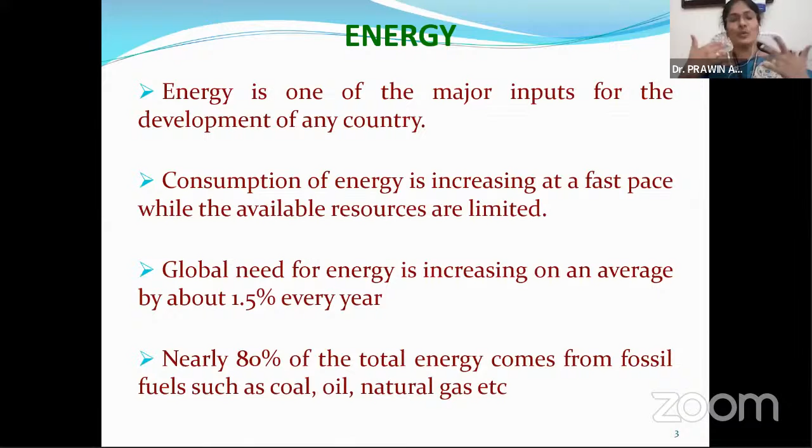We can't still keep on telling that energy is not there, energy is not there. Instead of putting our hands on someone else, we just turn it back to us: what we can do to increase this production of electricity.

Now, what is the actual drawback of fossil fuels? This coal, we have used for more than 100 years, and it is high time that we have to think of some other resources. Oil reservoirs are estimated to be just for 42 years, I guess. Gas reservoirs are estimated for 60 years. Now, this much is the lifespan for each and every fossil fuel.

Now, after that, even if you want to dig it and take coal, take oil and take gas, where from will it give? It has a limit, right? So we have to move into the next one.

And of course, because of this coal, oil, and gases, if you keep on using it, it will lead to lots of pollution, and of course it will lead to greenhouse effects. So it is our prime duty to concentrate on a different renewable energy resource in a way to conserve energy as much as possible.

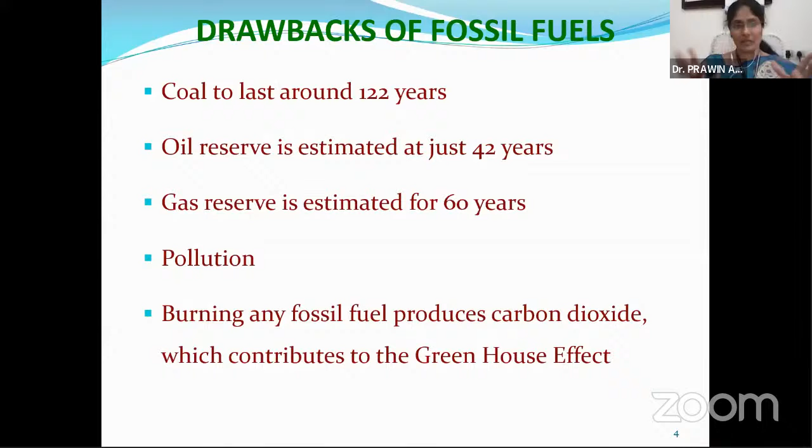Being said the drawbacks of the fossil fuels, I would like to highlight the advantages of renewable energy. Of course, there will be no pollution, no harmful effect, no waste products are given, and it reduces the cost of operation also. And it is inexhaustible, that could be got any time. It will not exhaust, unlike coal, gas, and oil which are limited for a certain period of time.

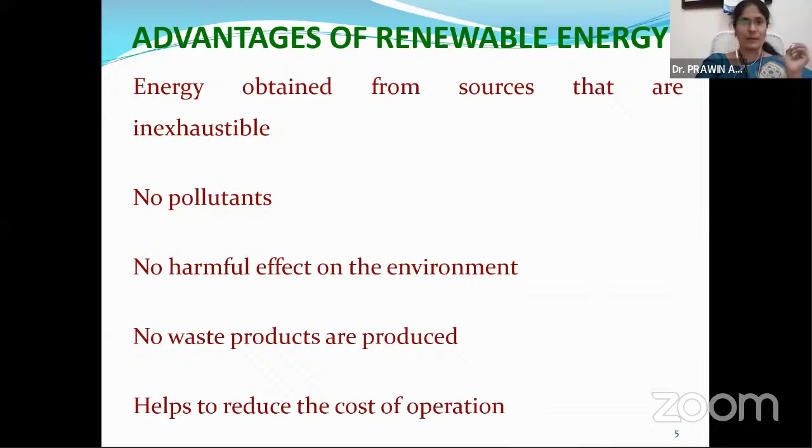But in my presentation I would be highlighting hydropower, because as you heard in my introduction, I have been involved in few government projects. I personally felt that rather than talking about solar, wind, or whatever it is, I would like to highlight hydro projects which I have worked on, and how energy could be conserved by using these resources.

Before that, I would like to give you certain energy demands in our country. If you see the graph, in the year 2040, the increase is a 333% increase of energy demand required for our country.

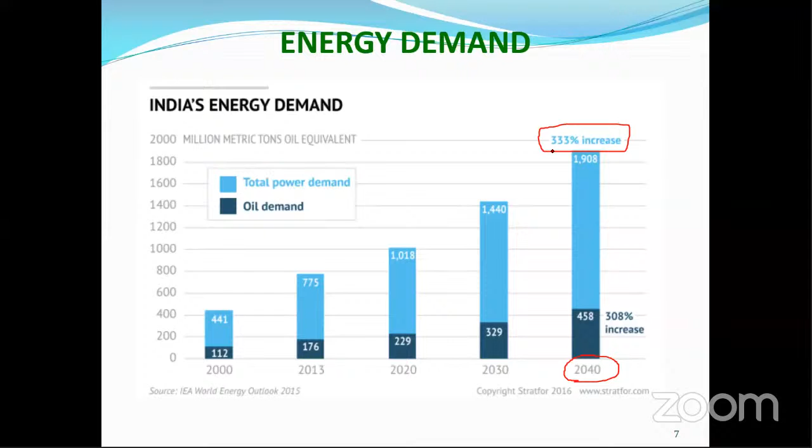So the power capacity, we have added a lot in India by wind, solar, and a few other small renewable resources. I've just taken the statistics for the year 2018. For 2018, coal was only 25%, wind was 12%, solar was 50%, but renewable energy utility was 74%. So we were able to have an additional power capacity higher because of this renewable energy.

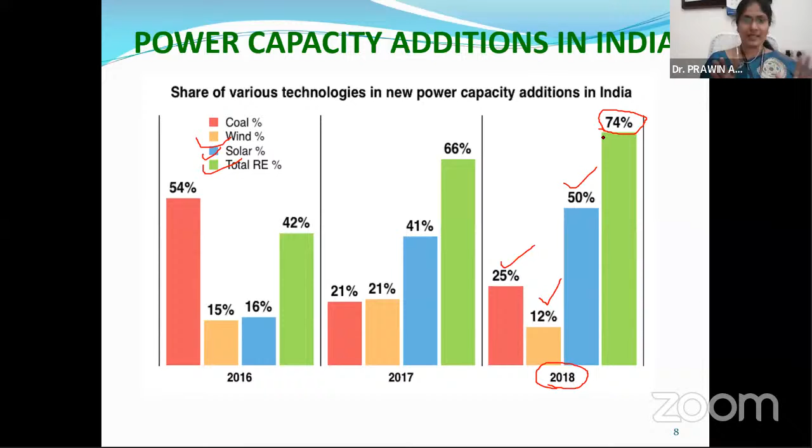All these things are not told by me, I have just drawn the graph, but these are all statistics. You can Google, you can see Wikipedia, and all these things I have just projected in a slide for you to get an idea. So none of the data given here is exaggerated, it is all exactly as per the statistics of Indian government data.

Now, being said about the advantages and disadvantages, we want maximum customer satisfaction. And how to achieve it? How to conserve this energy? I'm talking about energy being required, but how to conserve it, ma'am?

If that is the question rolling in your mind, and few of you might have a doubt, like, we want power for all, the country should be self-sustained with energy resources, we should not go and ask someone else for energy. So we wanted energy for all. If that is the question, here comes the answer: eyeing on the silver lining of certain points, how to achieve it could be through generation capacity, improving the generation capacity, improving the power quality, metering methods, deregulations, distributed generation, automation, so many aspects are there.

As an electrical engineer, I am putting it forward to you. But our point of discussion today is on energy conservation, one of the major factors which could be taken up by any layman in the country to see that everyone is happy with maximum power.

So energy conservation is the major parameter. We have so many electrical parameters as listed down in my slide, but energy conservation is really important to make India economically strong.

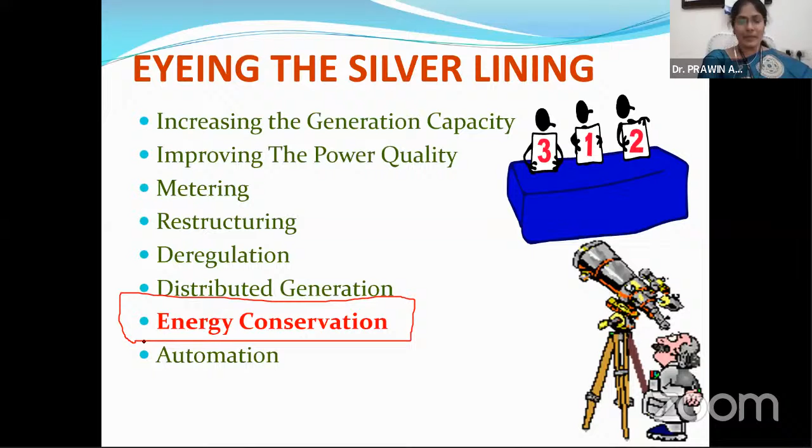Okay, so now I have told you certain requirements of why energy is required, and I've given you a few highlights about renewable energy. All these things you might already know, right?

Okay, now I'll give you certain statistics of history: what are all the accidents that happened before, not only the accidents, but what are all the issues faced and how we are going to rectify it. I just took this analysis when I had to prepare these slides for the presentation. I was really doing a very long survey to find out what are all the hazards taken up and how I'm going to give a solution for all these things.

Way back in the 1930s, we normally say—can anyone say what is the frequency level of our electricity supply?

Ma'am, are students given the provision to unmute their microphones? Yes, ma'am, they can unmute and answer.

Okay, so anyone, if you know, you could answer. If you don't know, also no issues, not to be bothered about it, because whatever I'm going to ask has something to show in the presentation I'm presenting, that is the reason I'm asking you. I know you're all first years, but you're all smart enough because you have studied your physics in your 11th, 12th, and 10th boards, and that is how you are into a very good institution now, so you're strong in your basics. Now, what is the supply which is there? What are the two different types of supply?

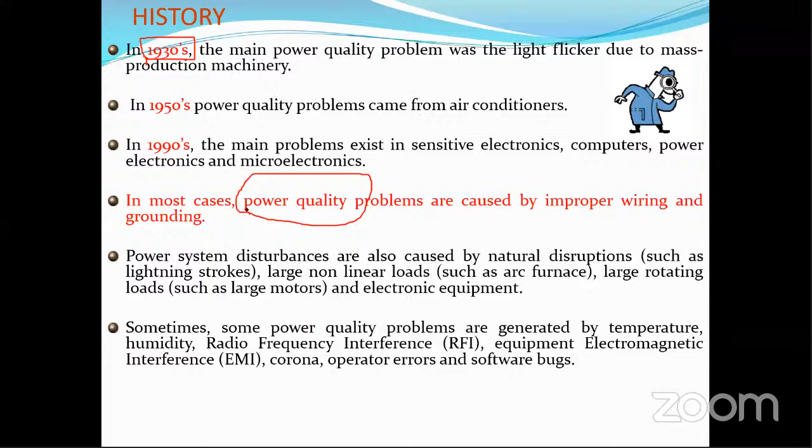asks you, please respond to them. Next time onwards, if anyone asks you why is it that you're not able to connect, the frequency level is entirely different, and that is the reason when you get a mobile phone from US or UK, you can't directly plug into it, because our frequency level is only 50 hertz, but their frequency level is higher at 60 hertz, and they don't have power failures at all. Very rare power failures are there, but I have found out a few statistics wherein they also had power failures, which I'll show in my slides now.

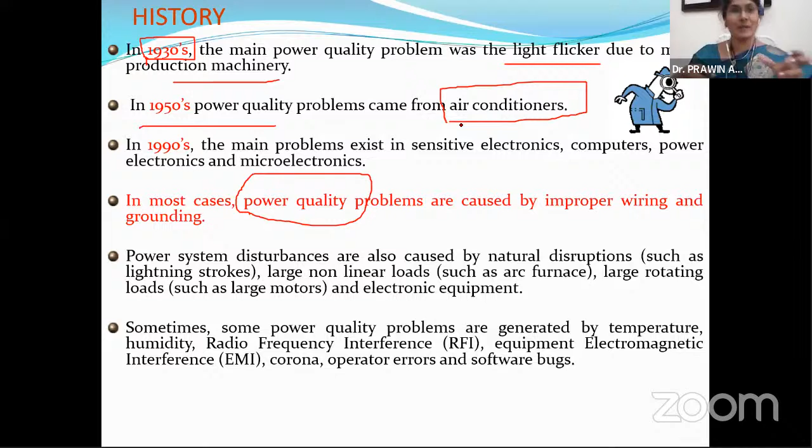Now coming back here, in 1930 there was a main problem of light flickering due to mass production in machineries. In 1950, there was a problem because of the air conditioner. Air conditioner is a heavy energy consumption device. Okay, I'm coming into energy one by one. In the 1990s, the main problem was because of using electronic gadgets, computers, microelectronics, and so on.

In December 1996, I think December 3rd or so, in Scotland, the power supply was interrupted for 3 to 6 days. Normally we say only in India power supply issues happen. No, India is taking care of us so well that we should be proud to be citizens of India. With this much population, we are running a conservation scheme, and the government has put up different conservation schemes, and that is the reason you and I are seated here on an online mode with no interruption in power supply.

So it is not that we are not doing anything, we are celebrating this day actually. When do you celebrate your birthday? For which you are happy. So we are happy today that India is moving forward on energy, and that is why we are celebrating today as Energy Conservation Day.

Now, the data and statistics which I'm putting down here is not to put down any other country or anything like that. I'm just trying to project to you that India is doing energy conservation, which could be improved by citizens of India like you and me in the future. That's what I'm trying to project to you.

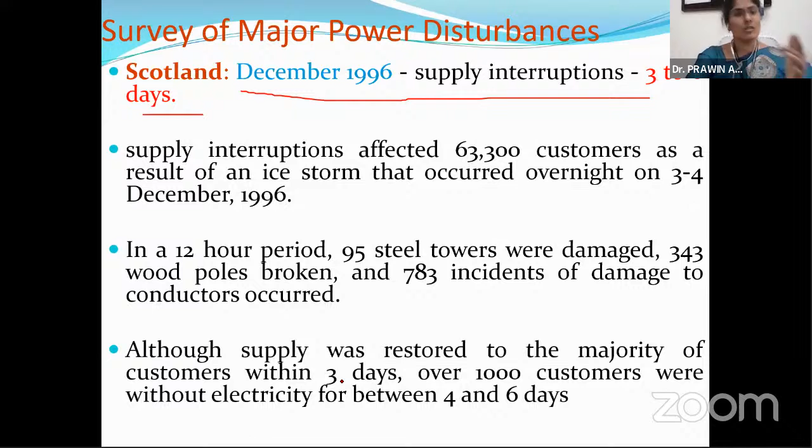Coming back to this, so when I was just browsing and seeing if there were any issues in December, since we are in the December month, there was in Scotland, December 1996, an interruption for 3 to 6 days. More than 60,000 customers were affected because of this, and lots of steel towers were damaged because there was no power supply. Lots of incidents took place there.

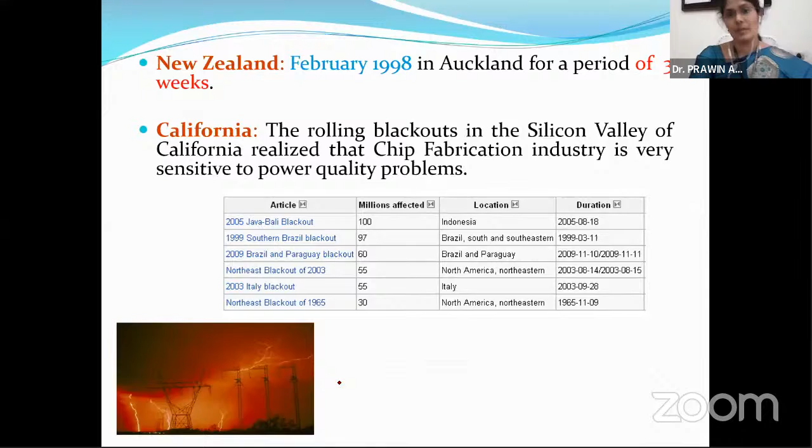Even in New Zealand, in February 1998 in Auckland, for a period of 3 weeks they had power failure. And in California, the blackouts in the Silicon Valley made them realize that the chip fabrication industry is very sensitive to power quality problems. And one was in Canada in August 2003, at the height of ice storms, more than 3 million customers were without power for 4 long days, sustained by severe winds greater than approximately 20 kilometers per hour. This caused lots of issues in Canada in 2003.

There is a small diagram, a picture that I've taken from Google to show you. So that is about country statistics.

Coming to our country: on January 2nd, 2010, the northern region, that is Himachal Pradesh, Jammu Kashmir, Chandigarh, all experienced a very bad interruption on the night of 2nd January. It was because of dense fog mixed with pollution, which was the reason that failed the strength of the insulators and increased the conductivity along the surface of the insulators, causing flashovers, and because of that, tripping occurred.

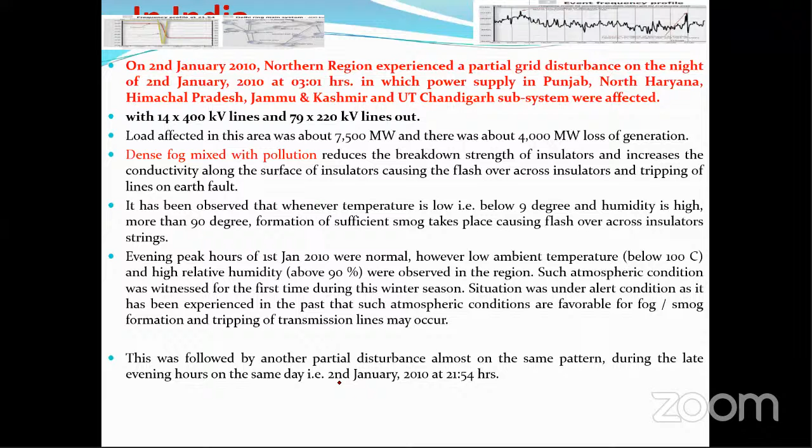All these things are a little bit electrical, but I just wanted to tell you why that happened. Now, dense fog mixed with pollution was the reason behind the issue that took place in Himachal Pradesh in India. We can't analyze what happened outside the country, so let's analyze what happened inside the country. This pollution is because of whom? That is a big question mark.

I'm not going to give you an answer. Can we reduce this? That is conservation of energy. You can't, because you can't directly take energy and put it in a different box and hide it. No, you can't do that. But you can do better conservation of energy by giving your inputs to such sort of issues that have taken place.

Coming back to this issue, it has been observed that whenever temperature is low, that is below 9 degrees and more than 90 degrees, some sort of smog, that is fog, takes place, which causes flashover. This is an analysis that they have done. This evening peak, the evening peak hours of 1st January 2010, were very normal. But however, because of this ambient temperature, observed in that region, such atmospheric condition was witnessed for the first time during that winter season. This was the reason which led to fog and smog, and it tripped the transmission line very badly. This was the reason behind it.

So now I've just given you a history of what happened in California, what happened in Himachal Pradesh, and all these things. But there is a difference between saving power, that is saving a lamp, saving 1 ampere, and lowering the power bill. This is a big question that has to be interrogated and thought about.

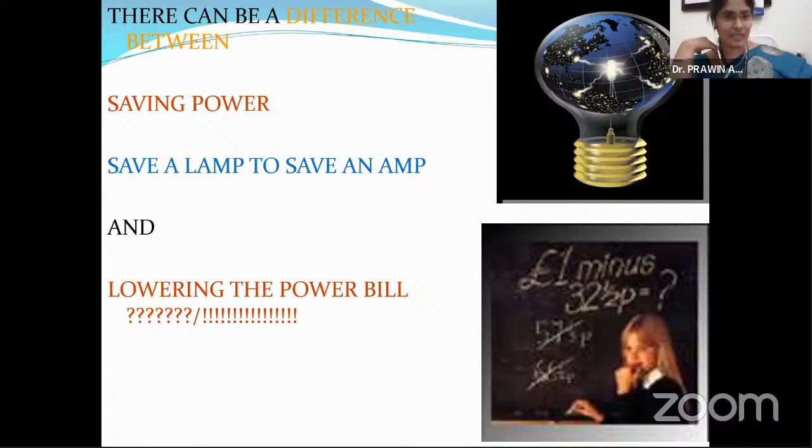Now, since we are talking about energy, as I showed in my previous slides, there are lots of energies. I would like to touch upon hydro energy, because this is my work which I have worked on. So rather than giving other details, I find convenient, and my data would be really apt if I talk about hydropower. Okay, any questions, students, until then?

Now, what is hydropower? Hydropower is actually a proven renewable energy resource, and it requires relatively high initial investment, which I accept, but has the advantages of very low operating cost and long lifespan.

Now, the government has given a lot of subsidies even for solar plants. We can generate solar power and even give it to the grid. They even give us a subsidy. But the reason why we are not taking up these renewable resources is the initial investment is very high.

But with renewable energy, the initial investment would be high, but in course of time, the economical advantage would be really surprising. People who don't know about these things, a layman can talk, but those who are in the field, you and me, are educated. We know what energy is, we know what renewable resources are now, as of now. In course of time, you will be studying more about it. So by the time you finish your third year, when you finish your degree, you should be able to give something to the society in terms of your projects at least.

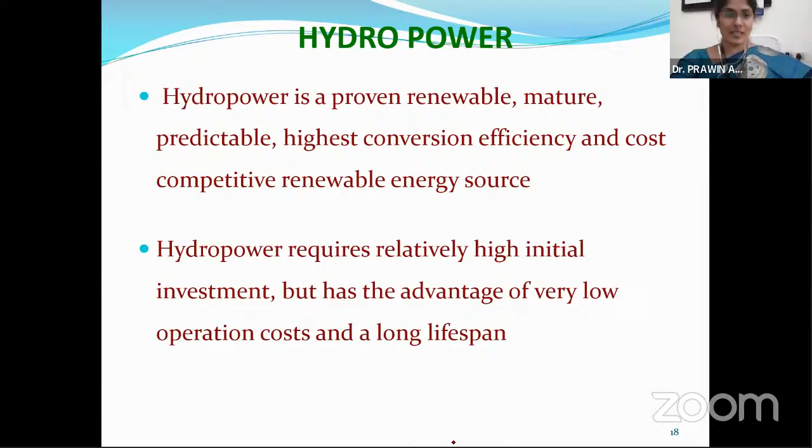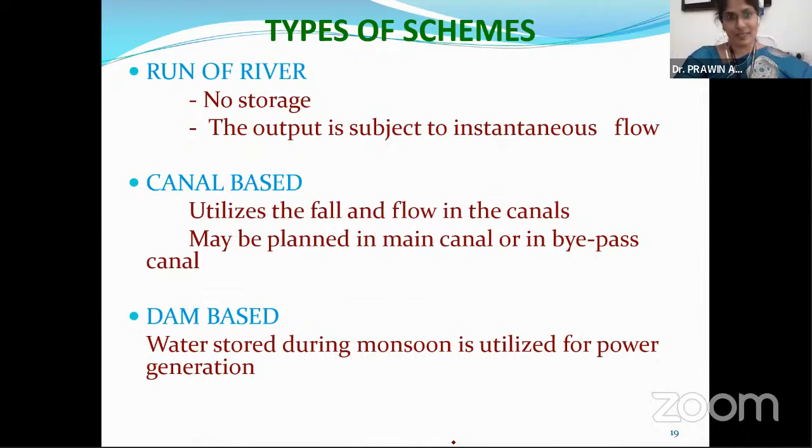Coming back to our presentation on hydro. Hydro projects, basically, we have different types of schemes. When you go for an outing with your parents or for any tour, you would have witnessed all these things: a run-of-river, canal-based, dam-based scheme.

What is a run-of-river? At my place, and you also would have, behind your home if any stream is going. Even in Karunya, we have a stream, a very big stream. Karunya is situated in the Western Ghats near Siruvani. I don't know how many of you know, we have lots of streams. When we step outside the window and go and see, we see the waterfalls from the mountains, a natural stream. There the waterfalls come.

We are not going to stagnate any water. We will put a turbine, which is a powerhouse there with a forebay and tail race. You can generate electricity. The water will be coming, rotating, generating electricity, and it will be going outside.

Even the place where I'm seated now is the Triple E Department of Karunya University. We have a solar panel onto the rooftop, we have a windmill onto the rooftop. All these things are energizing our laptops, our computers, our fan and light in this room. So what I'm trying to say is it is a runoff scheme. Here in this hydro project also, it is a runoff scheme. Okay, so you're not going to stagnate anything.

You can see a run-of-river scheme wherein the river is flowing this way. We are just taking up that water, generating electricity, and again it goes back. This is a photograph I took from a site. You can see water coming from different streams, and all this water falls into the powerhouse. Electricity is generated, and again it goes back. We are not stagnating any water.

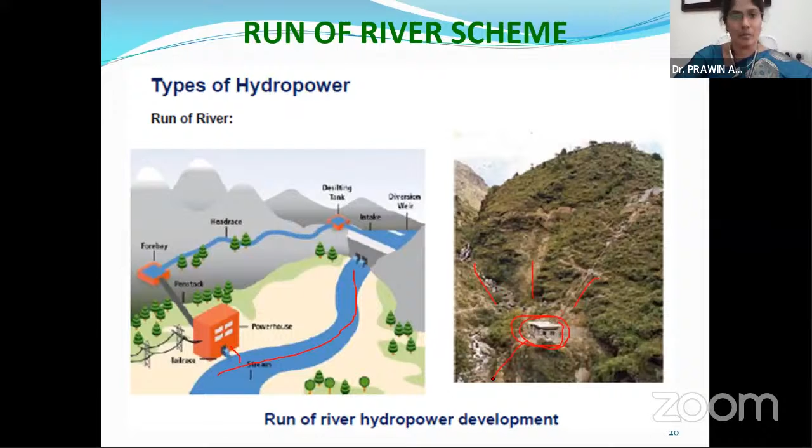That is one scheme, canal-based scheme. The water, which should actually run in this direction, we just take a spillway and divert it onto a canal, wherein we have a powerhouse, and electricity is generated. Quite simple, right?

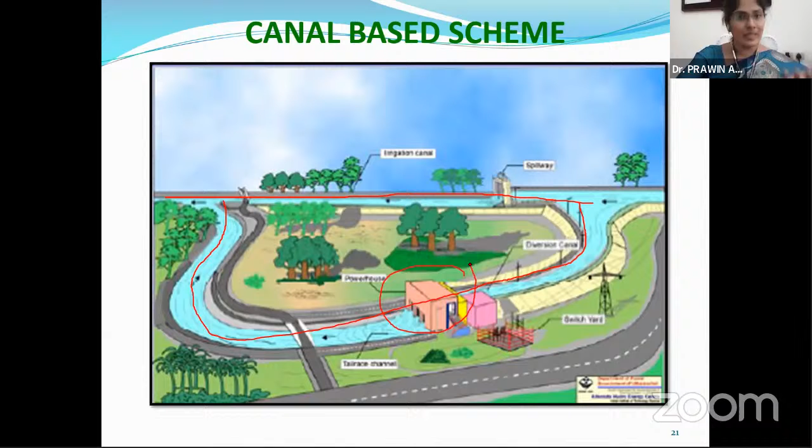This is canal based. We also have dam based. I think all of you know what a dam is. A dam is on the head, the pressure which has fallen down. Now the water falls at a very big height, from 90 to 100 meters head. When the water is falling at very high pressure, this pressure is converted into energy.

Being said this, I'll give you an example. Long back in the newspapers, I read about a college student in Bombay or Pune. It was a 20 floor apartment in Bombay and Pune. They reside in apartments, right? So in that 20 floor apartment, they do rainwater harvesting.

So that rainwater is collected from the terrace, and directly it comes and falls to the ground where a turbine is placed. This turbine, the water comes and falls down from a big distance, 90 meters, 100 meters, or 200 meters. Just assume a 25 floor apartment, the water comes at high speed, touches the turbine, electricity is generated, and that student was able to electrify his wing, whatever floor he is living on in that apartment.

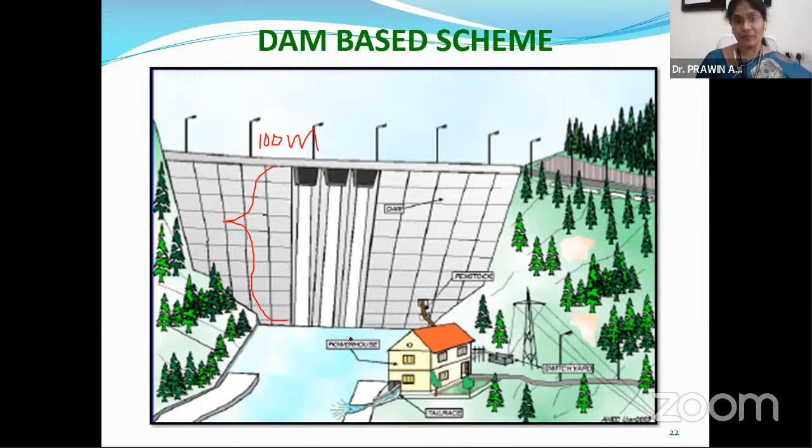Okay, moving down here, I told you about this project with the student I mentioned in Bombay, right?

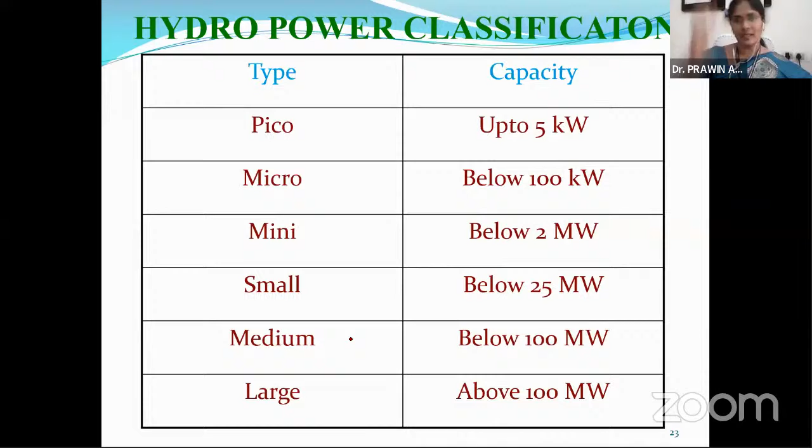We are not asking you to do any megawatt conservation. Do some 5 kilowatt conservation. This you can very well do. Rainwater collected comes and falls onto the turbine, you can very well do this.

So what is this small hydro power? Normally it is a run of river scheme. You and me can't do a dam immediately today, of course you can do it in future, you can very well do it. But as of now, do small conservation with this hydro projects which I explained to you right away. This is not expensive, it does not require a transmission line. You can just use small pumps, turbines, small motors, and you can just keep moving.

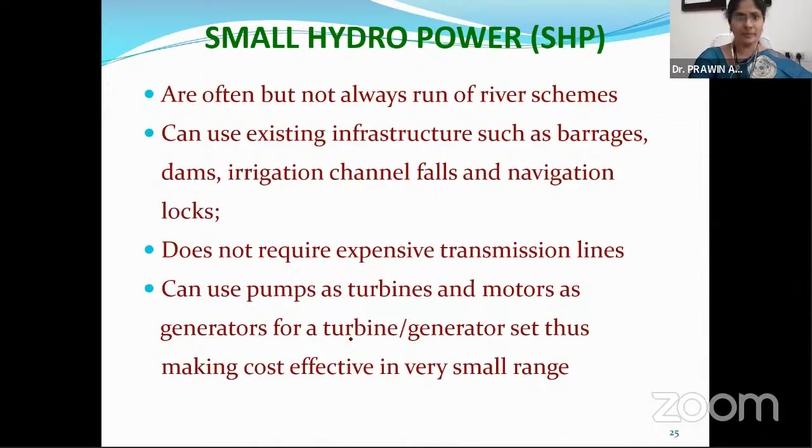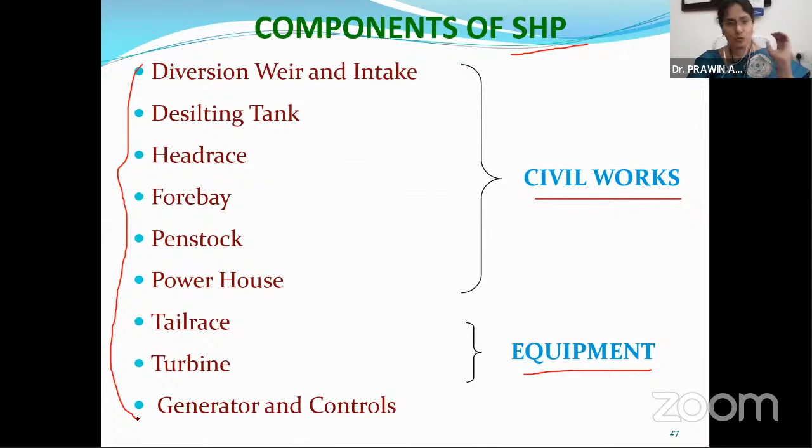If anyone is interested in starting up with an SHP, SHP means small hydro projects, you have a few civil works and you need to have a few equipments as shown in the diagram in the slide here. Normally I take this for civil engineers and others, but since you're all first years, I felt I should not go too deep into it, but you should just know, if you want to do an SHP, all these components are very well required.

This is just a schematic sketch of the SHP, wherein you have an inlet, and this inlet will be through from the river, this is the river. The part of the river you will be taking it. There will be an inlet, wherein you have a forebay, sometimes called a surge tank. This long, lengthier portion is only the penstock, and then it goes and hits the turbine. So this turbine, wherever it is there, that is the powerhouse.

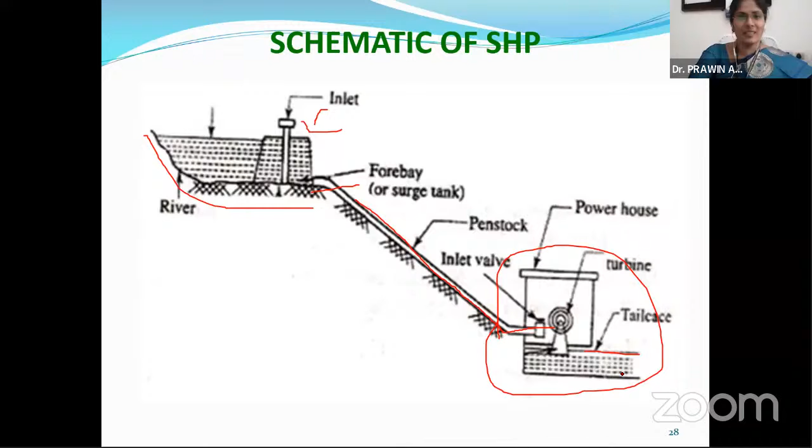And then you will be having a tail race. Even now, if you go to Ooty, Paikara is there, it is a hydro project. Has anyone witnessed the Paikara hydro project? You would have gone to Ooty, right? All of us are staying here down, so some of you have gone to Ooty. Next time when you go there, go and look out for this penstock. This was done by Indian people. This tunneling, they actually drilled into the hills of Ooty, and this penstock tunnel was created.

If you have time, I even took my students to Paikara Falls in Ooty. It was excellent. As a student you can go, but as a tourist I think you will not be allowed to go on an industrial visit to that place. It is really amazing, they took us down to this part. See, till this water level here, till this part we were taken, all of us were standing here witnessing. It was amazing to see the water coming at high pressure, touching those big turbines, and going out to the river again. We are not stopping anything. So if you have a chance, go for an industrial visit.

So I think I told you 4 projects till now, and the 5th one is I'm encouraging you to go for an industrial visit to witness these hydro projects, because big dams, different dams that have been constructed, dam construction is excellent in our country. If you have time, when you go for an industrial visit, please have a look at all those things.

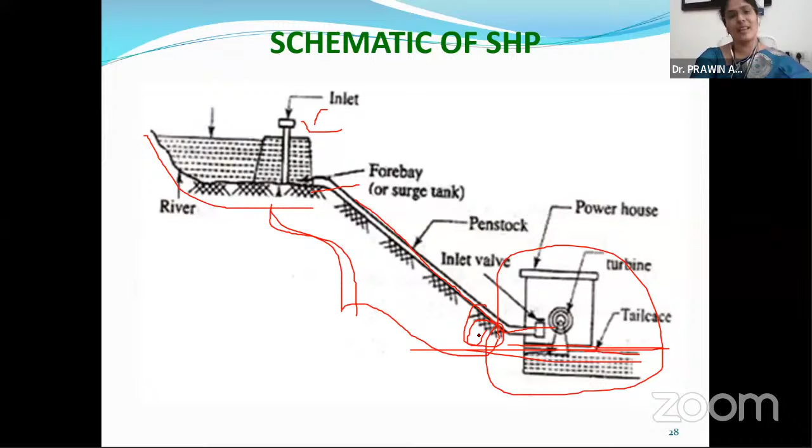So this is just a schematic sketch of the runoff scheme. You can see the water flowing, taken up with this powerhouse, and it goes back into the river. We are not keeping any water to ourselves, we are just making use of it. So the run-of-river scheme is very easy. This could be done as a project.

Behind our college here, as I told you, a stream is flowing. Our students put a turbine in that running stream. We have an aeronautical department, so we used different aeronautical blades there, and the power generation was really good. So they did a centrifugal water rotation. The water is coming to the rivers.

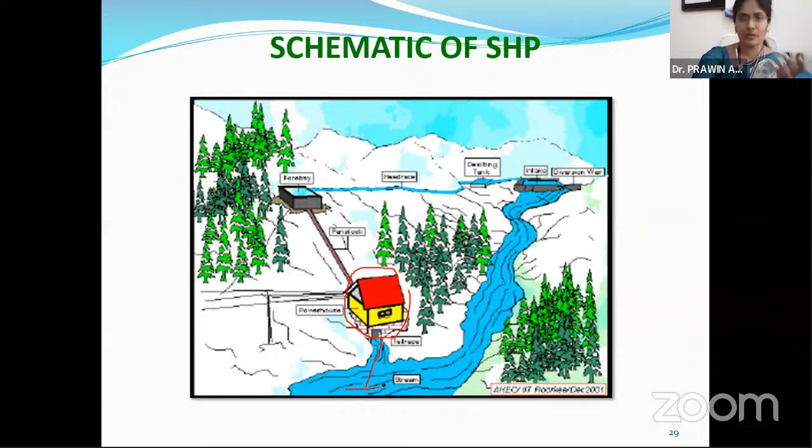They made it as a centrifugal rotation, so that's why the pressure will be high. When the pressure is high, the energy that is being generated will also be really high. So that is also yet another project that you could do.

Now, coming back to the basic equations of power, or potential energy. Power is given as the product of density of water, discharge, acceleration, the head, and the overall efficiency. Head means the distance from where the water comes and falls down, like I showed you in the dam. That is the head in meters.

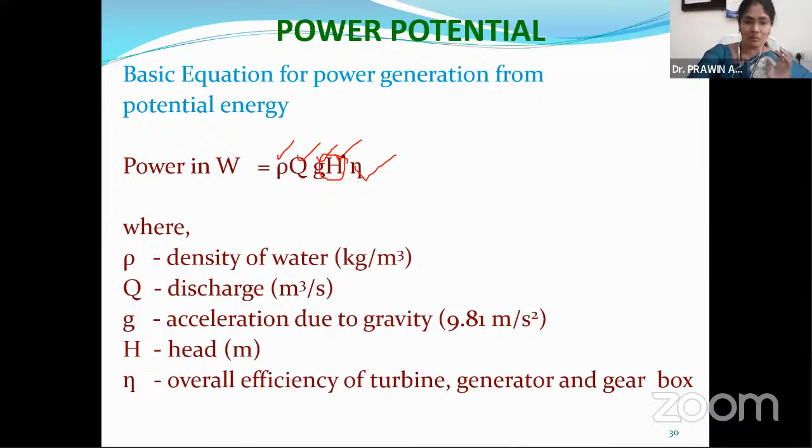For a good small hydro project, the efficiency depends upon the efficiency of the turbine, the generator, and the gearbox. So average efficiency is around 75 to 80%.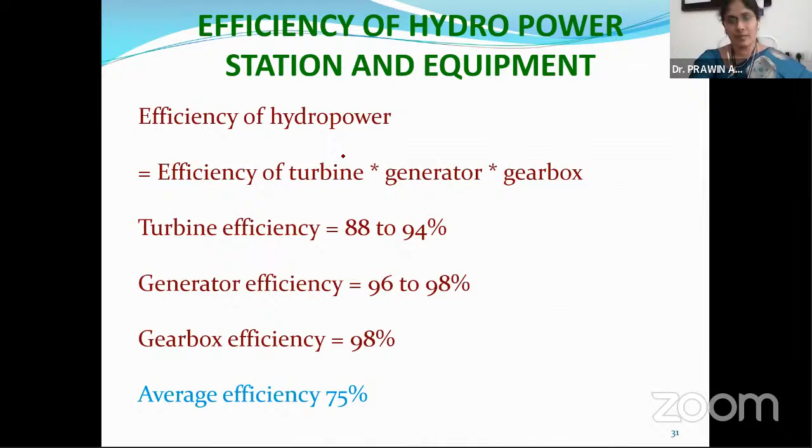If you want to do an energy conservation project on hydro, you must have a preliminary feasibility report, then a detailed project report, and then you move on to execution. Even when you want to construct a home, you can't go and construct it right away. You have to check the sand level, check the rock. If any rock is there, you can't just put a house there. If you do that, when water comes, your house will be taken out. So that preliminary feasibility report is very much required before starting any project.

So I started with energy conservation, gave you certain history behind the issues, and now come into hydro projects. What should be inside this preliminary feasibility report is the hydrological survey, the topographical survey, geological survey, power demand, the discharge survey, the technical feasibility, and any critical issues that need to be addressed.

Having said this, I'd like to mention that I applied for a hydro project. We identified a place in Kerala where they didn't have electricity. It was a tribal community. They didn't have anything, and the only resource they had was waterfalls. Then we, as a team from Karunya, along with civil engineers, mechanical engineers and myself, went and investigated that site. It was a huge waterfall, and those people were residing very near to it, but they didn't have electricity.

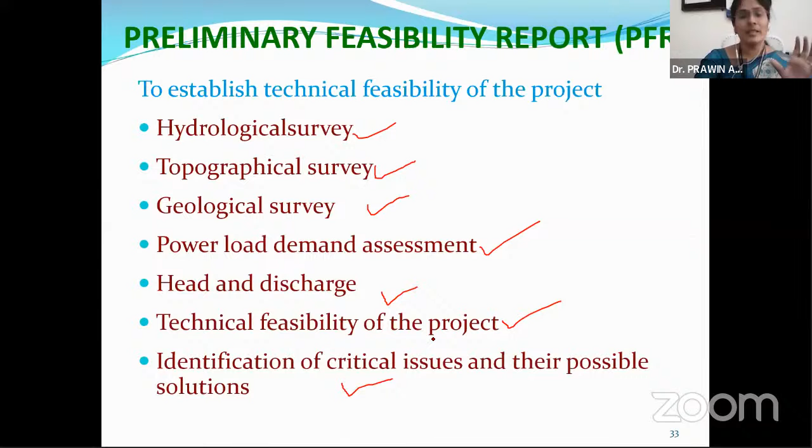So we did a complete study on the water, sand, people, the location, and whether a hydro project could be placed there. I owe my gratitude to the students of Karunya; they helped us, they went and did the study. We went there too, but we had lots of people residing in Kerala, so we gave this project to them and they did a complete study. Their project was preparing the preliminary feasibility report.

So then we went on to the detailed project report. Again, they had to find out the discharge of water, because a small head won't be sufficient enough. There should be pressure in the water, and only then can we take up the hydro project. So they did the hydrological survey.

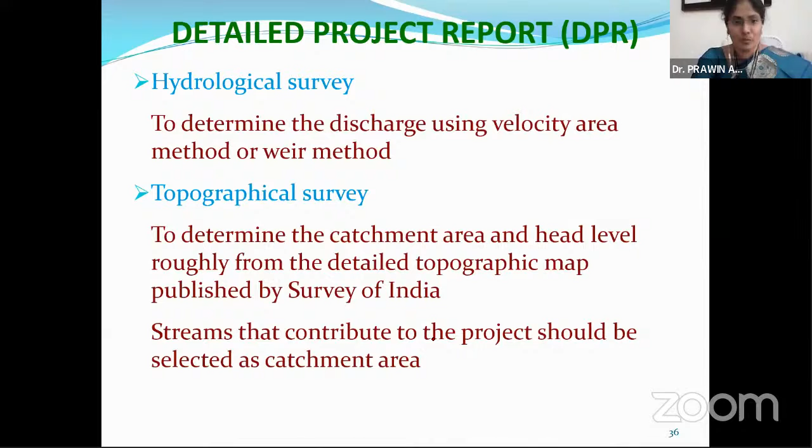They did the topographical survey. Topographical survey means they get the meteorological data and see the map. For example, you can't go construct a hydro project on top of a hill, because if rainfall comes, the hydro plant itself will be vanished. So we have to do a topographical survey, and this is the map that I'm showing you.

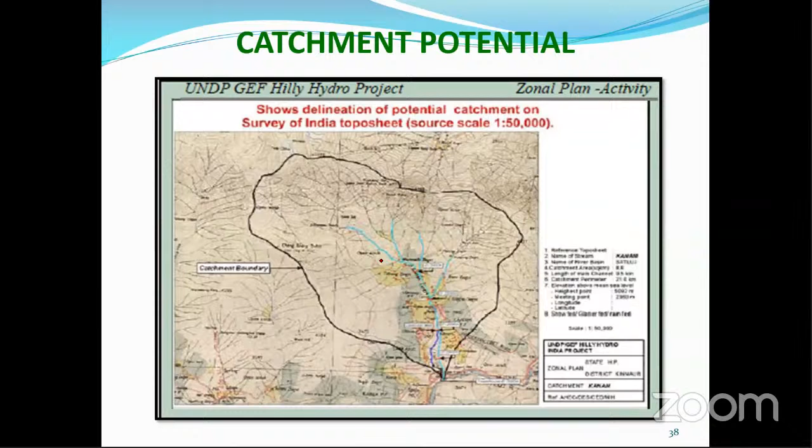And there they had a very good resource of water. You could see this catchment area, the blue streams flowing here. These blue lines show that it has a huge energy of water. All this forecasting data is available with us, really available, but the only thing is we should be able to take up energy conservation on this.

So this we call the catchment boundary. Catchment means the area which is a high resource.

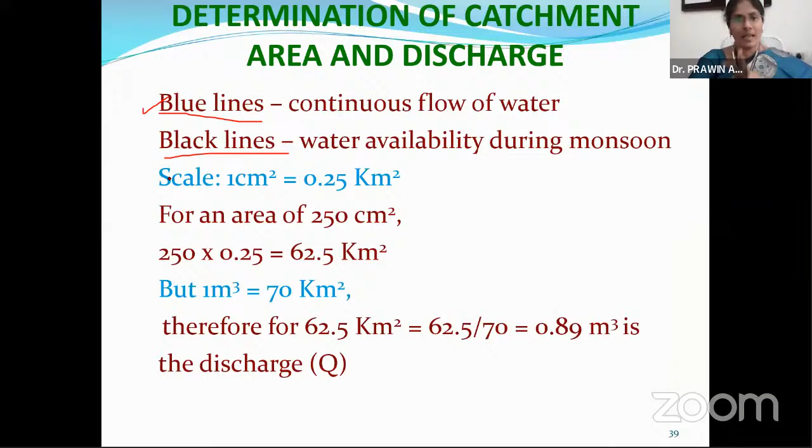So you would have seen blue lines and black lines. Blue lines mean continuous supply. Black lines mean only during monsoon, because you need electricity throughout the year, right? You can't just stop it for some time. So if that's the case, you need a continuous flow of water, then you'll be moving onto blue lines. Certain areas will have black lines, meaning that will be only during monsoon. Now, this area alone has continuous blue lines, meaning throughout the year, it is having a very good resource.

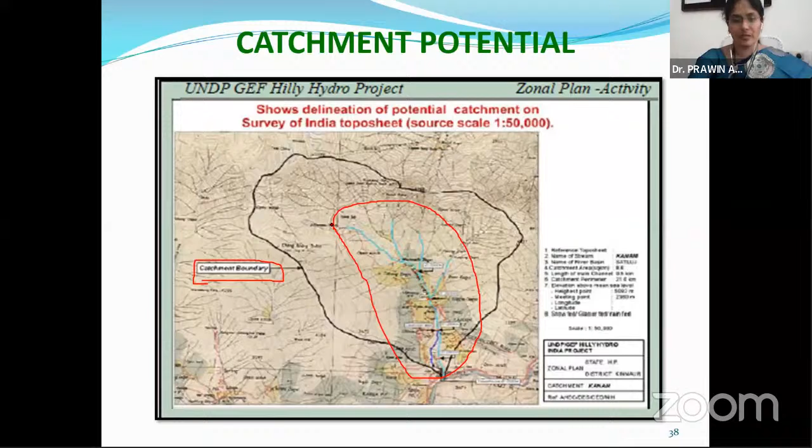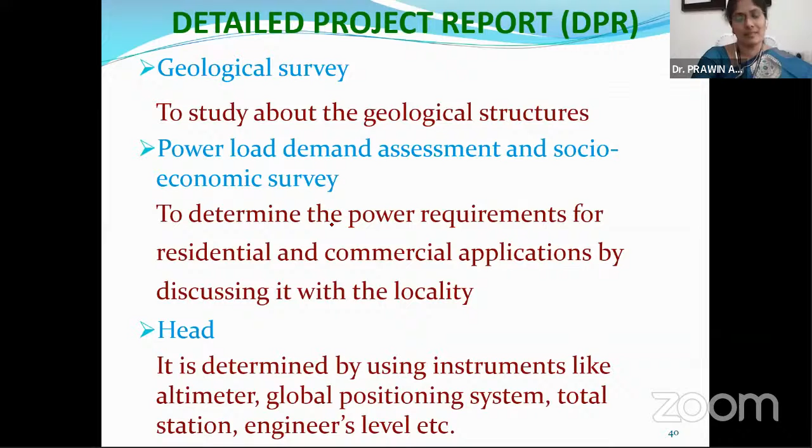So I'm not going into the details because I have shown my own project report. The geological survey, the topographical survey, the power demand, the head, the height—all these things were analyzed. At the conclusion, I will show you all these pictures, I will show you the site itself. And then a survey on whether the materials could be taken up to that place, the power evacuation—all these things were surveyed on. So all those things were a little bit on electricals.

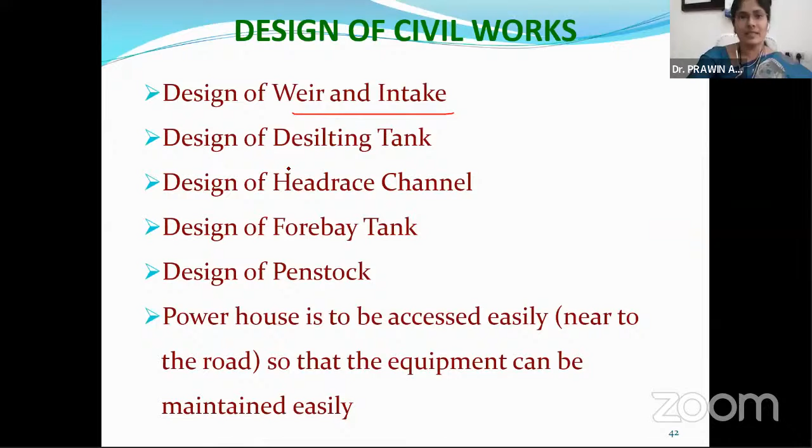We also had civil engineers along with us. We even had the civil students. Again, I would like to show my gratitude to them. They helped us in designing the weir and intake, desilting tank, head race, forebay, penstock, and the powerhouse construction—all these things related to the civil structure. So they helped us in doing all these things.

Now, I've spoken continuously for the past 10 to 15 minutes. One small question—okay, you know the electrical power formula, I've given you the formula. I have just made some changes in the power equation: increasing the discharge of water and reducing the head, or reducing the discharge and increasing the head.

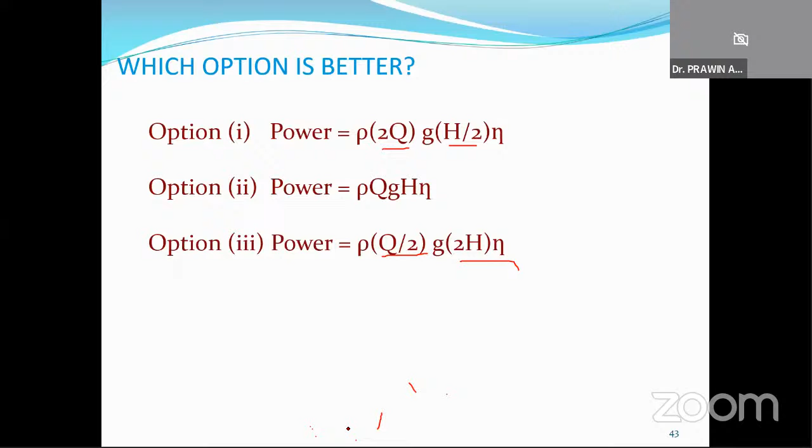Excuse me. Okay, so just excuse me for that. I had a little cough, that's why I just muted. Hope you could see me now. And am I audible also? Yes. You can hear me, students?

Yes ma'am, thank you. Now a small question for you, okay? This is the power equation which is there. When you talk about hydro projects, I'll explain the question very clearly to you. The water has to fall from a very height—100 meters head or 90 meters head—so that it comes and falls onto the turbine and electricity will be generated. So here, the water height is more, but even the discharge of water could be small. Next option is, the height is only this much, but the water discharge should be very huge.

So I'm just asking you, when do you feel that the power will be generated more? Is it where you increase the discharge and reduce the height of the water falling, or decrease the discharge and increase the head? You just leave option 2, I am just giving you one option. Just tell me whether it is option 1 or option 3. Hope my question is understandable. If you have any doubts, you can just ask me.

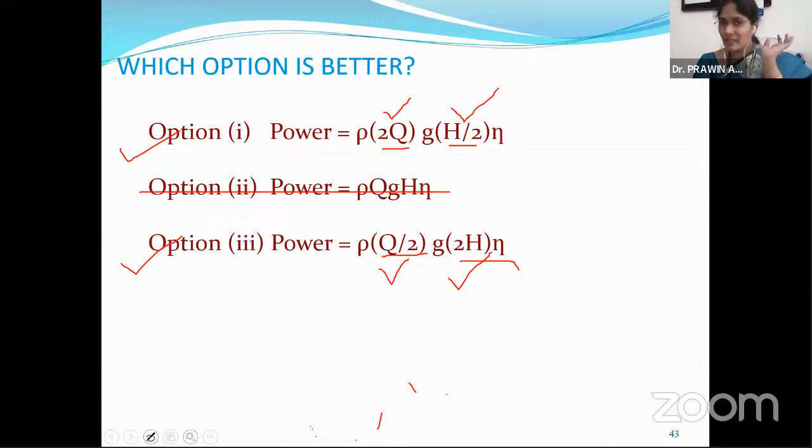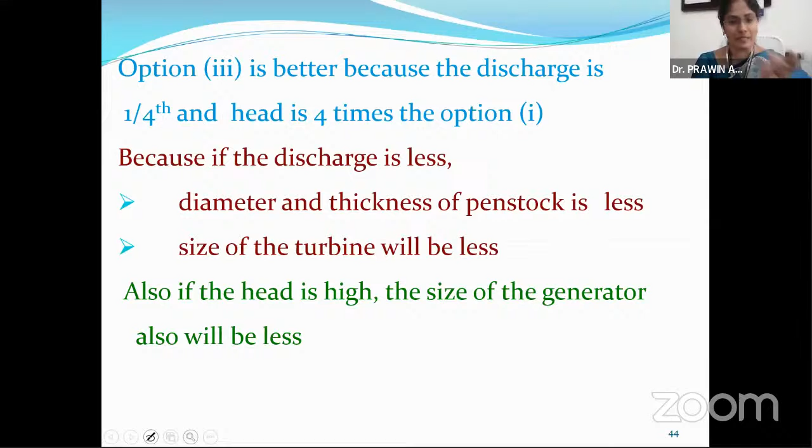But anyway, statistics says that option 3 would be better, because the discharge is one-fourth, but the head is four times that of the other option. Because if the discharge is less, students, then the diameter and thickness of the penstock is also less, and the size of the turbine also will be less. Also, if the head is high, the size of the generator also will be less. So in my project, it's depending upon site to site, it might differ. In my project, I have taken up option 3.

Okay, now so I've told you a little bit of electricals, I've told you a little bit of civil. I'm telling you about the turbine because I think the turbine is the core part which I didn't speak to you about yet.

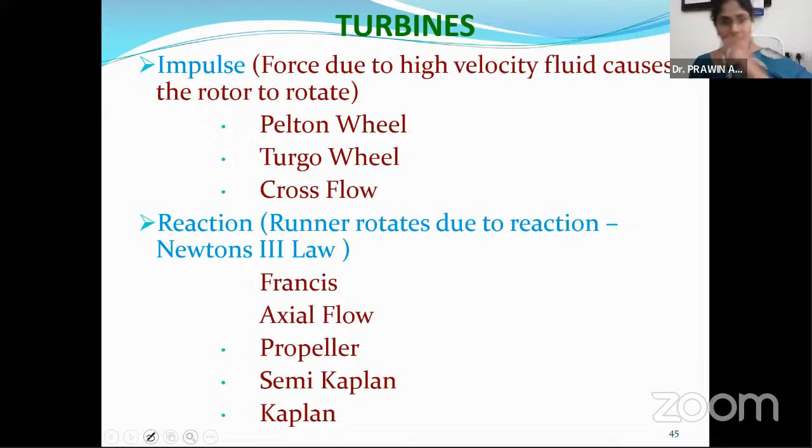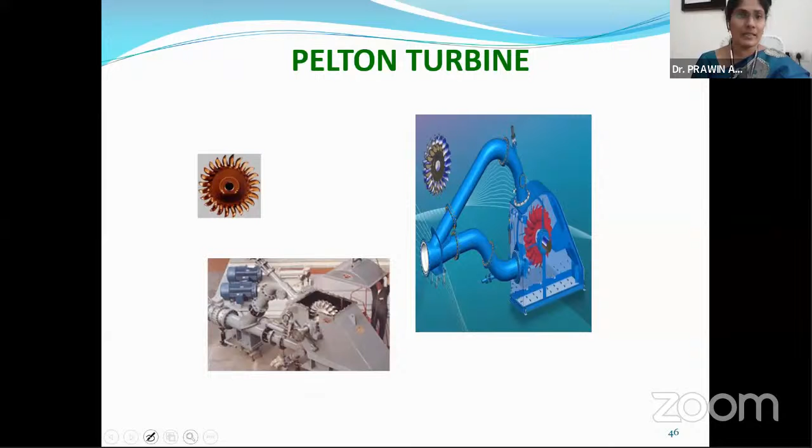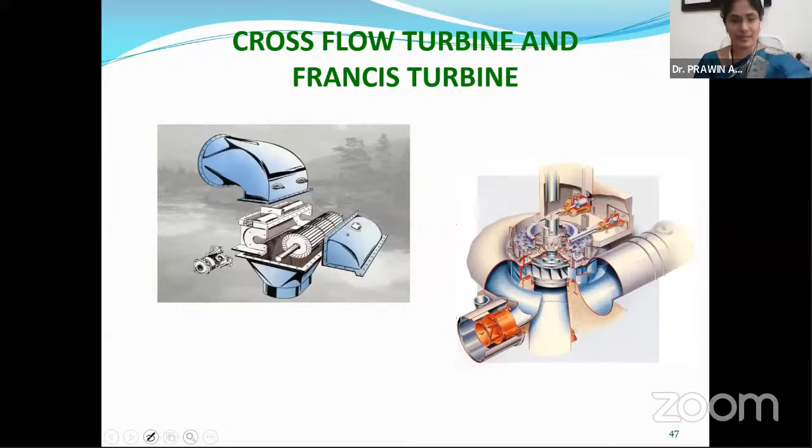It is according to Newton's third law, the runner rotates due to the reaction. These are some pictorial representations which we have in our own laboratory. We have different Pelton turbine, cross-flow turbine and Francis turbine. I am not moving on to construction and operation, but as of now it's sufficient if you know this alone.

Now again, for power generation, which formula should you select? I told you option 3 is the best. Now for selection of turbine, I'll give you one formula. If you want to select a turbine, you have to select based upon the specific speed. No books will give you all this data, students, because since we did this project, we know all the hardships we faced. So on what metrics you should select the parameters itself is a big study which we did for one long year. So I'm putting it in a nutshell and giving it to you.

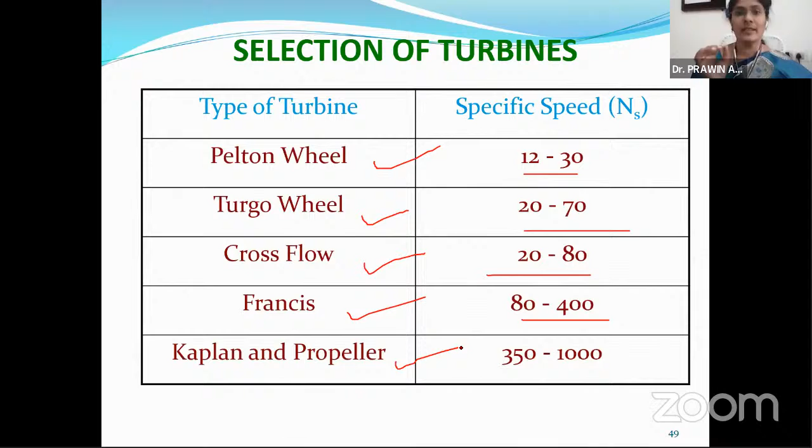Now all these things are very important if you do a site investigation. So anything above 150 also, you can use your Francis turbine, but there is no hydraulic turbine which is available for specific speed more than 1000. This is again a research topic that I'm putting forward to you. If you're interested, you can do this and it will be patentable. This work is really patentable, which is not taken up by anyone.

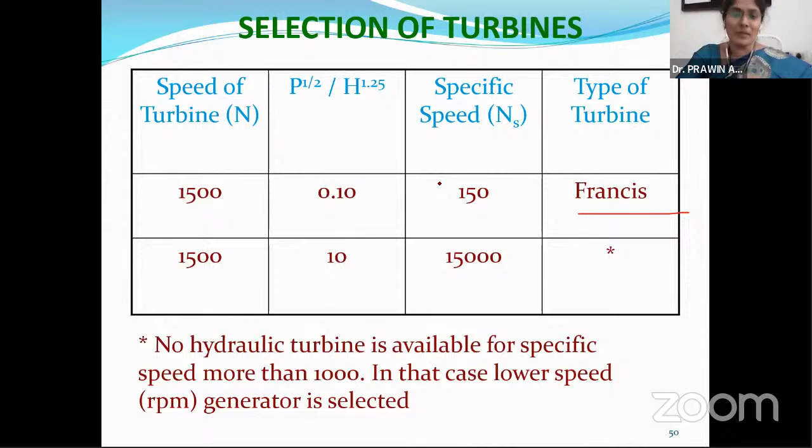So I have given you 4 different projects. I have given you 2 industry visits. This is the patent topic that I'm giving to you. Anyone interested, work this out and you can go in for a patent. So this is all onto the selection of turbines.

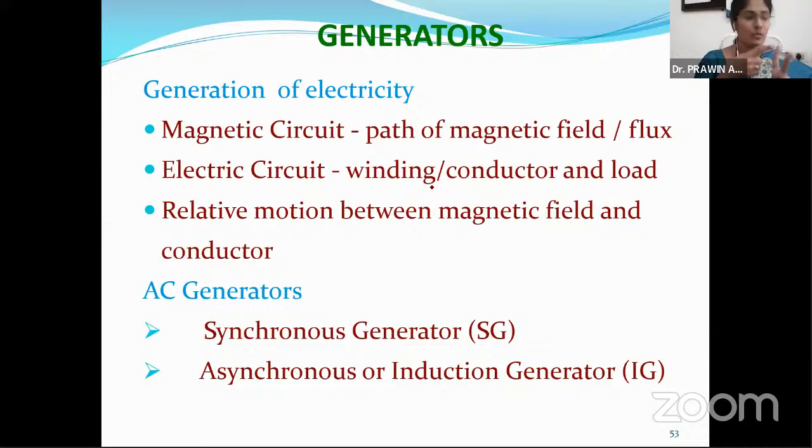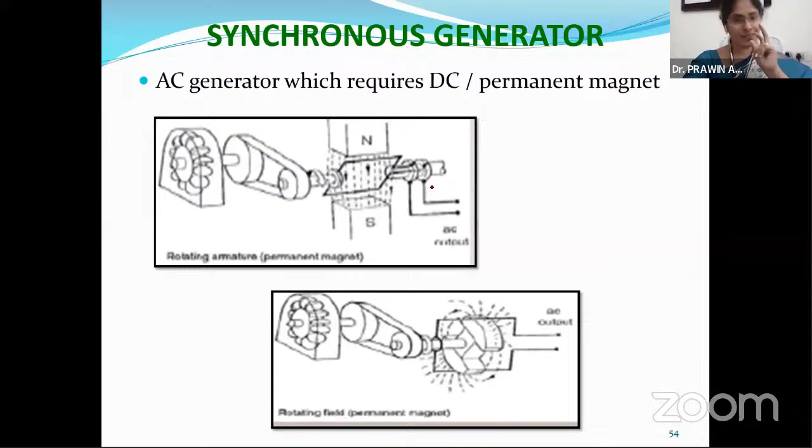Now onto the electrical part. So I finished about the site investigation, the civil part, and the mechanical part. Now I'm going on to the electrical part. After the water falls onto the turbine, the generator is there, and you have 2 types of generators: either a synchronous generator or an induction generator. Synchronous generator would require DC or a permanent magnet. Again, students, I'm not going into the detail of the construction because it's not required for you. So you can just note down that synchronous generators could be either DC or permanent magnet type.

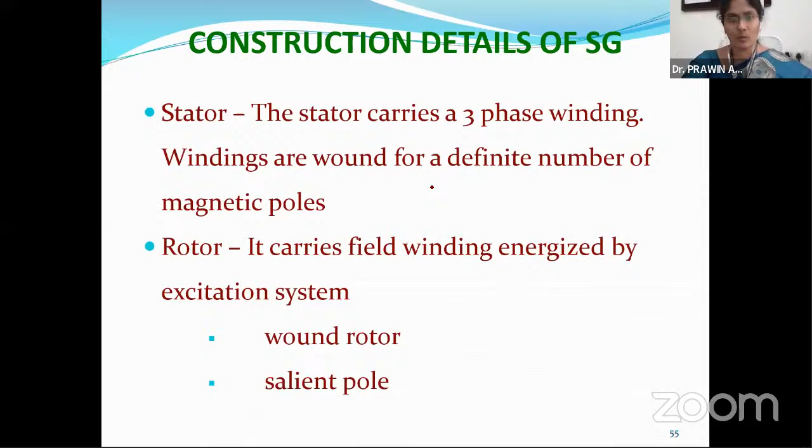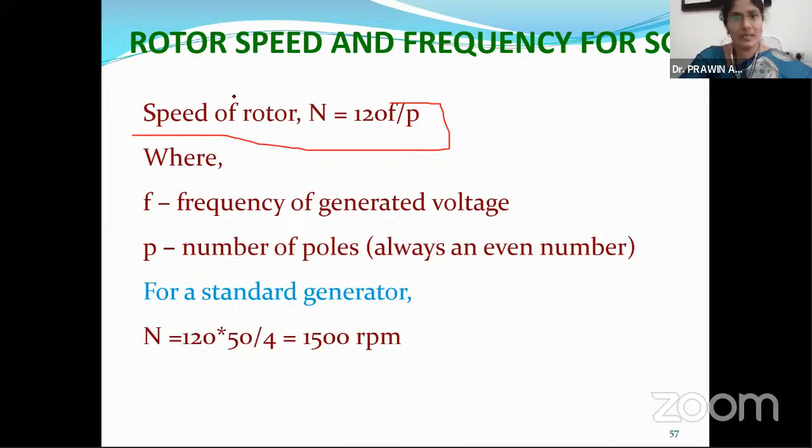So this is the constructional details with stator and rotor. Any motor would be having it. The rotor would be having the field winding, which would be wound rotor or salient pole rotor. This is a pictorial representation of the synchronous generators, and formula to find out the speed and the frequency. This is the formula which I've used in my project.

And if you're using an induction generator also, you can go in for that. There are certain differences between the synchronous generator and induction generator, based upon the project you're going to select and what sort of energy conservation you want to do, you can either select a synchronous generator or an induction generator. That's why I'm giving you the classifications between synchronous and induction generators. Students, I think this is not that very important for you, so that's why I've just scrolled through the slides, and for want of time, I just made it up.

Do you want any detailed explanation on this? Shall I proceed with my slides? Can I proceed with my slides, or do you want me to explain this? Shall I proceed with the slides?

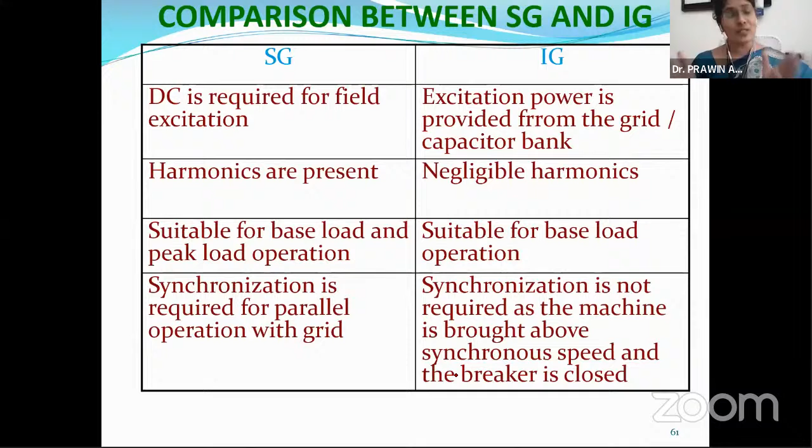I just wanted to know whether you wanted these details, but this is very huge. I think I should talk to you for yet another hour. If that's the case, I'm happy to do it, but within this span of time I'm concentrating on how to conserve energy and what research I can give you as a student.

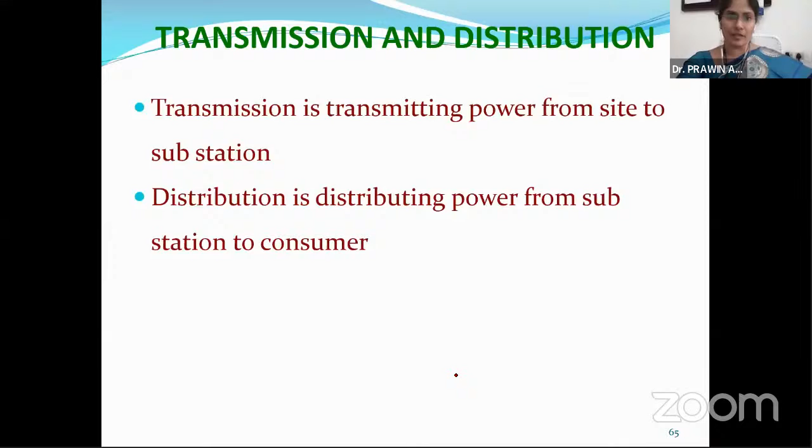So these are all parameters of how we can select the generator and how we are going to transmit it. Now, what are the hazards? What are the issues that I faced when I took up with these power plants?

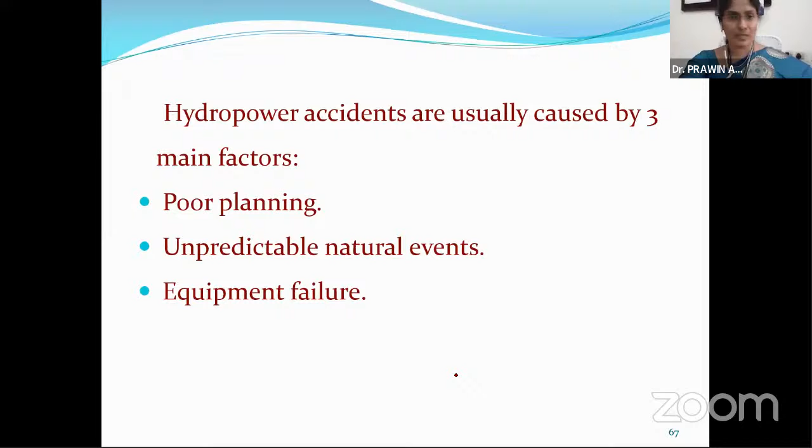Hydro plants have issues such as poor planning, unpredictable natural events, and equipment failures. So safety and protection is a very important parameter that has to be taken into consideration, and that is a major parameter here.

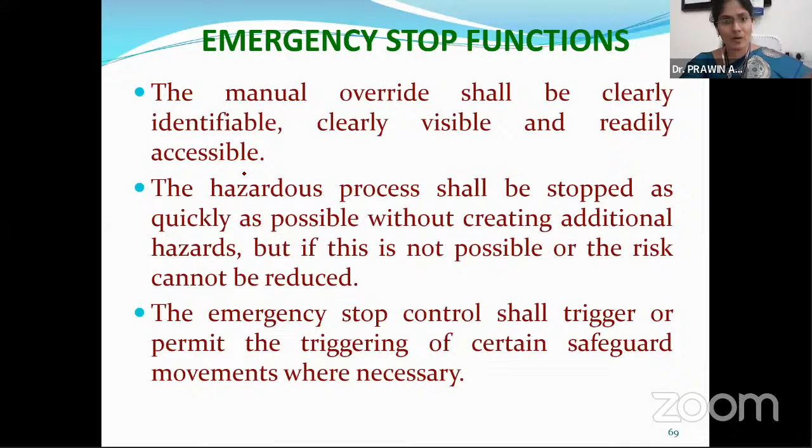Normally we have emergency stop switches because when we construct hydro projects in a river or stream, fishes would be there. If you don't put stop guards or isolators, these fishes will come into the turbine and it will literally spoil the life of those fishes. In turn, people are also depending on fishery. So those emergency stop functions should be really important.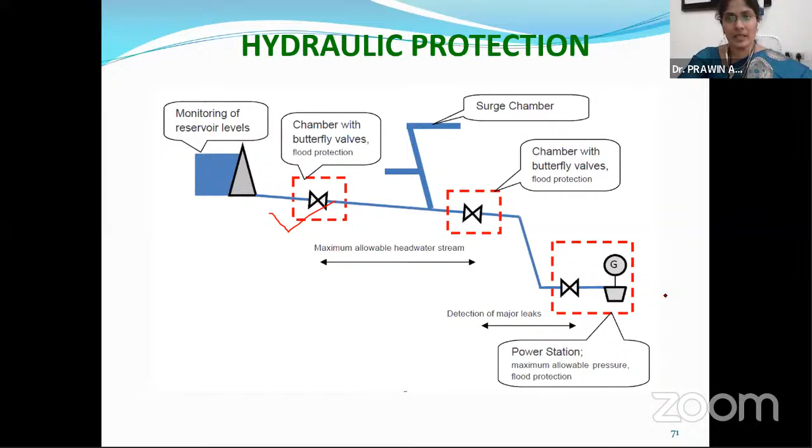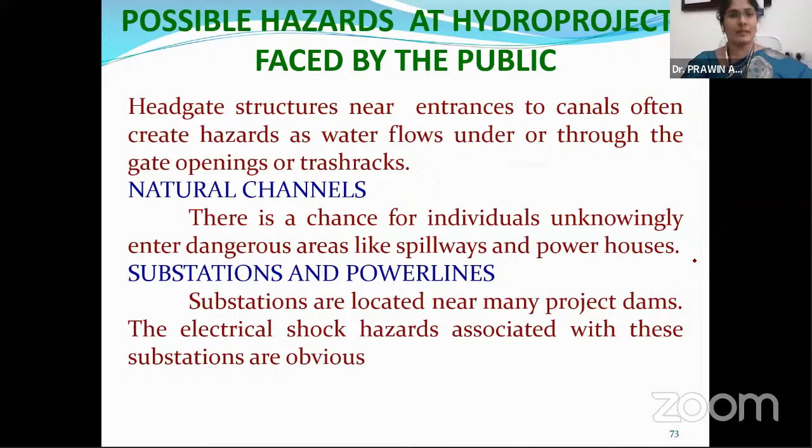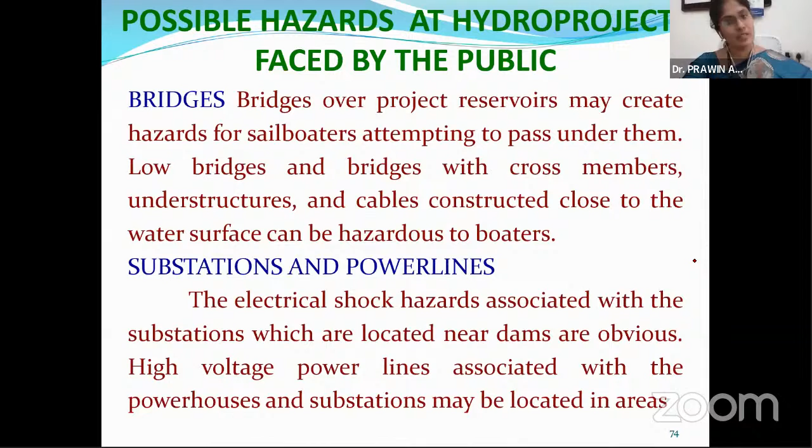So such spillway safeguard measures should also be taken. Substation safeguarding, bridges, power lines safeguard, and more than all these things, it should not have an unmanned operation. It should have a skilled person, because electrical shock hazards associated with substations near these dams are very obvious, since boaters or fishermen could accidentally make contact with them. That is also a very big point to consider.

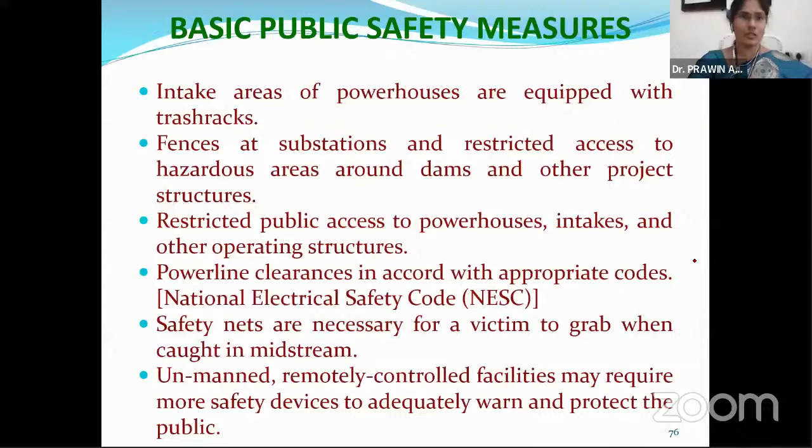But to start with, you should start with small hydro projects - that is my advice and suggestion to you. But in case you're going in for big projects, these safety measures also should be taken.

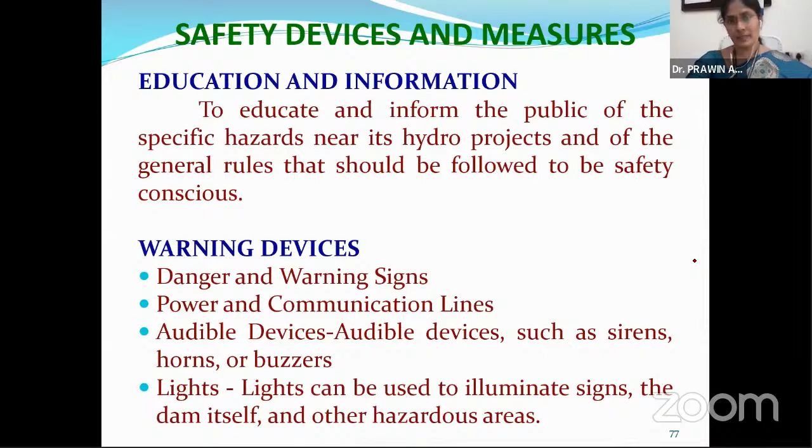Certain warning alarms, horns, sirens should all be there, because children or people should not come and take bath in that water. So certain sirens, horns, and lights should also be kept as safety devices, along with some fences and guards.

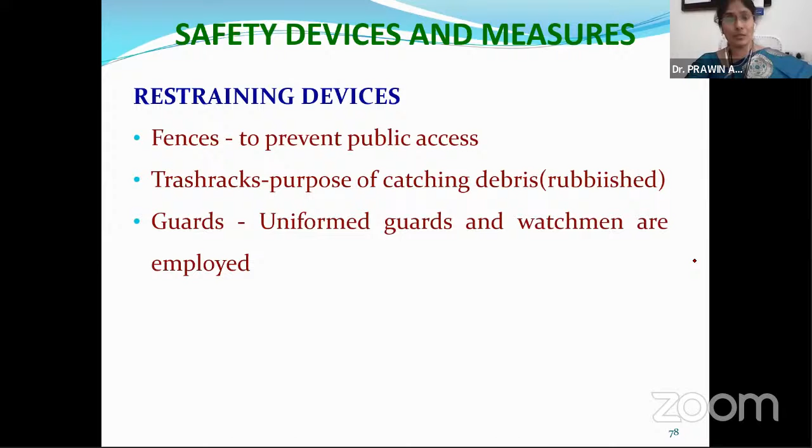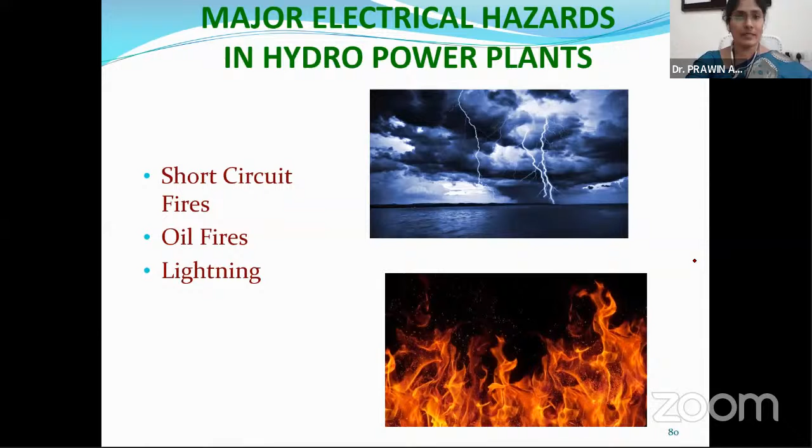Moreover, no rubbish should be dumped into the water, because that water will be taken up onto the turbines for energy generation. So if any short circuit fires or oil fires take place, that is a point of concern. The picture I'm showing you is to show certain fire accidents in hydro projects.

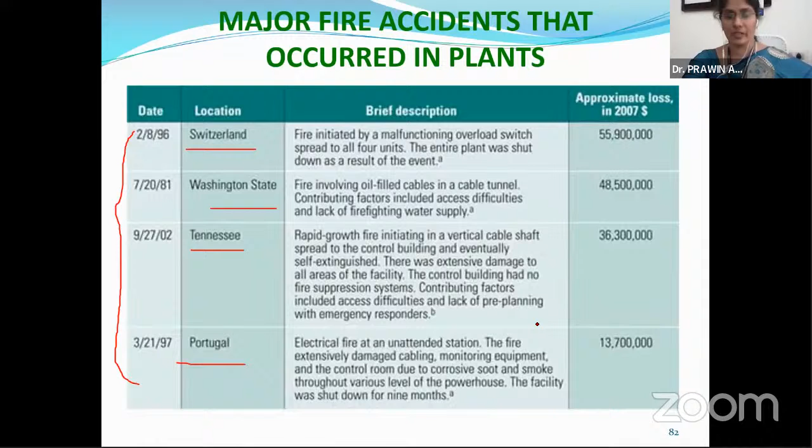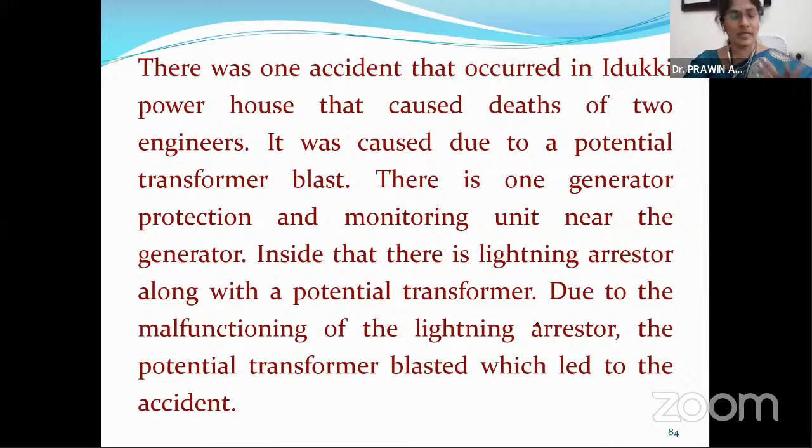Above all these things, there should be some safety equipment used when you move onto the site for renewable resources. Now, for the last few slides, I would like to show you some research areas that you could work on.

To name a few, I told you that being people from a physics background, you can work on some materials. You can use copper for windings, and you can change that winding using some other nanomaterials. You can also take up the project that a Mumbai student has done, an energy conservation project. You can even use sensors - if there are road bumps or speed breakers, you can keep sensors there, and because of the friction, that energy could be converted into useful energy. That is energy conservation. You can do projects on solar photovoltaic systems, and so many more are there which you could really work on.

If you're in want of any topics, you could let me know through your conveners. You can let me know. There are lots of projects available, even on solar, even on wind, even on hydro. So many projects are there. Based on our availability, you can take up with the topics.

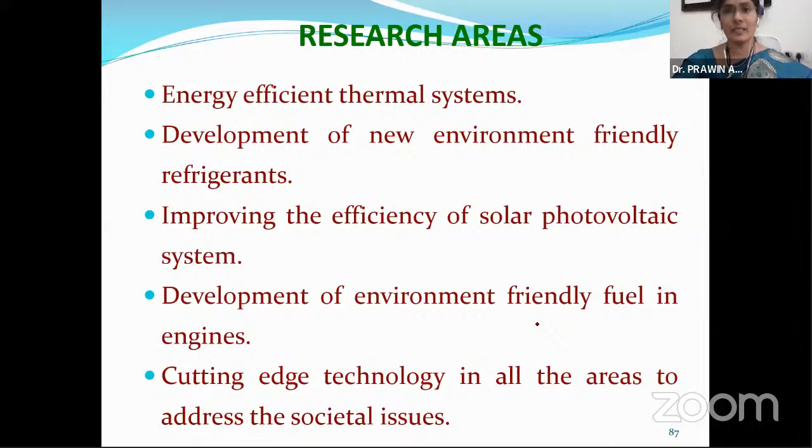Now, on to the concluding note, I would like to tell you that the present market situation is always demoralizing the young mind, saying that we don't have this in India, we don't have that here. No, we are all pursuing education in science - be it engineering, physics, or chemistry. We are all science people. We have lots of science within us, but incorporate that science, give back that science to your motherland in some way or other, so that the energy crisis should not be there for our future.

Today we are fine, but what about 50 years after this? Think over your children, your future children - what are they going to do? If we could plant some small seed today, that seed will grow into a big plant in future in terms of energy. So we have a long way to go, and a bright future is ahead of all of us, with so much opportunity in different areas, as I showed in this slide. But this is just a few examples - there are very many areas to invade into and do lots of research.

One small part of mine is that I am into entrepreneurship and innovation. I am the faculty tutor for entrepreneurship and innovation at Karunya University. And I have been trained by NEN - National Entrepreneurship Network. We have an incubator and innovation center in our college, where I am the faculty advisor, and I help out there. I have been trained by them on entrepreneurship and innovation.